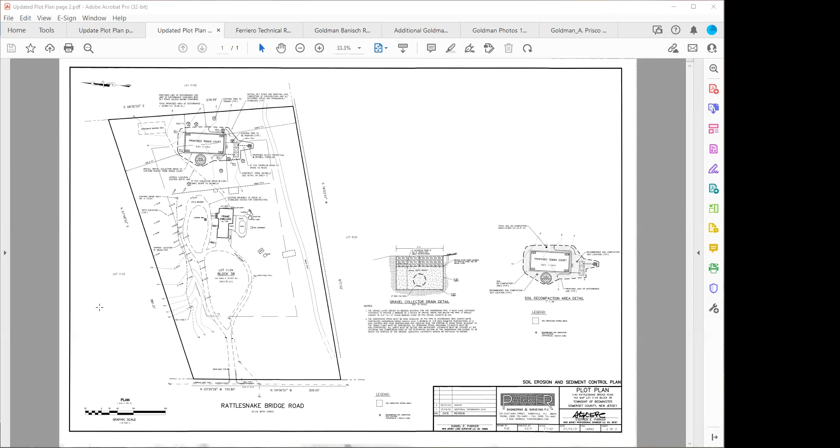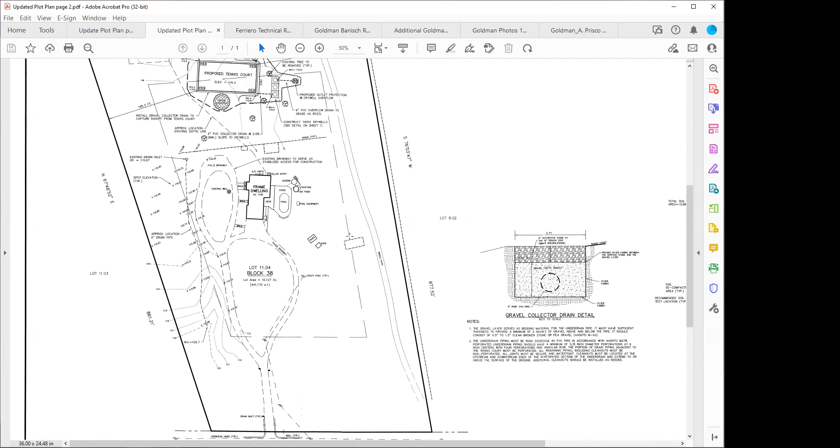If you go past the house continuing east, there's a fence which basically separates the front property from the back property. If you look at the property in totality, it's 10.1 acres. The front portion is about 7.1 acres, split from the back part by a split rail fence, and the back portion is 3.1 acres.

So if you opened up that fence at the gate past the house, you'd walk into a huge field, nothing in it but grass and trees. To the north you have woods separating my property from my neighbor to the north. If you walked all the way south, you'd hit another set of woods with a trail separating my property from Red Tail Farm.

If you walk to the very back portion of the property, past where the proposed tennis court is, you have additional woods there. I think my property runs maybe another 25 to 50 feet back, and then a neighbor's property, which must be set way back because I've never even seen the home, abuts us and the woods over there.

So the proposed tennis court location is basically dropped right in the center of the back property in the big field. It would be about 200 feet or more, separated by woods to the north. And it would probably be about 350 feet separated from Red Tail Farm, with woods, a trail, and then another set of woods which abuts the Red Tail Farm property.

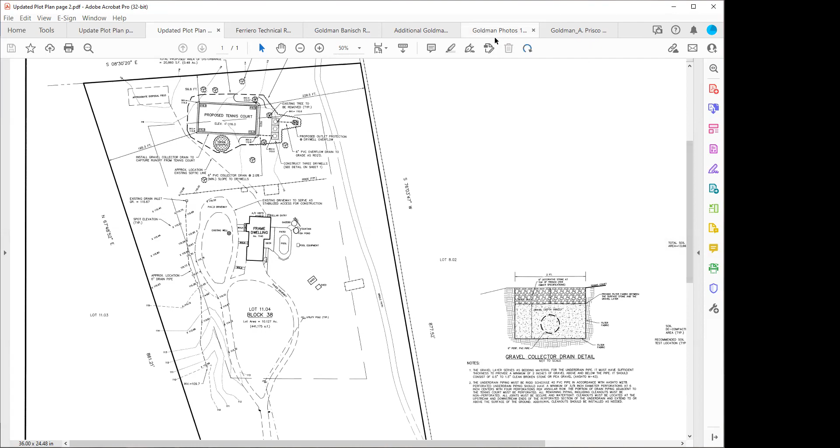Mr. Goldman, can you be on camera or is that not possible? I don't think I control that, I think Janine is the Wizard of Oz on that one. No, I mean, I'm on my camera, but right now my screen is showing the plans for the tennis court. All right, so you're sharing a screen somehow. Yeah, we are, but where it says his name, if his camera was on, it would show his picture. Is your camera on? My camera's on, yes. He's got a toggle on, maybe the setting. What do you think that is, Paul? I think his camera's not on. Yeah, you gotta check your camera, mister. Okay, let me check my camera. You might have to turn it off and turn it back on. What kind of device are you on? The camera I have is a Logitech. Are you on a laptop? Are you on a phone? I'm on a desktop. You go to the Zoom settings, you just click on the camera. Should be a video icon at the bottom of the screen. Right there, second from the left.

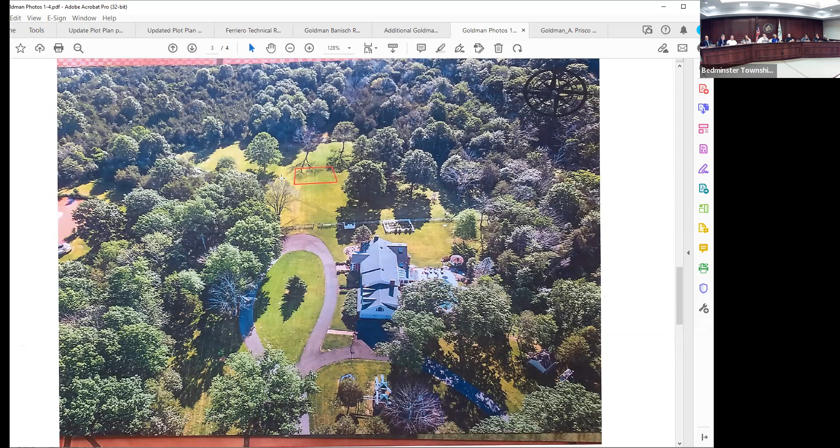This is looking south. This photograph is from the north facing south, with the Goldman residence in the top right portion. The proposed tennis court location is outlined in red, again in the lawn area.

What is that red area on the bottom of the photograph? It's a pond, just a pond, on the adjacent property, not on the Goldman property. That's on the property to the north, correct.

So that's the Goldman tennis court location. We can go back to the site plan, the plot plan.

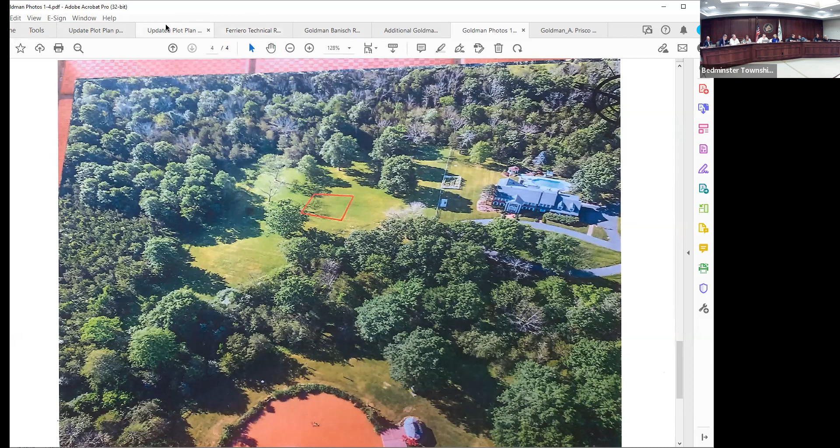Mr. Parker, again just for the record, the property is identified as block 38, lot 11.04, correct? That's correct. And what is the acreage of that property? 10.127 acres. And the zone it's located in? The R10 zone, that's rural residential, correct? Yes, correct.

You've described the improvements and shown them on the plot plan and the pictures, and you've been to the property personally, correct? Yes, I have. How would you describe the buffering around the Goldman property with regard to neighboring properties? It's pretty substantial, as you can see from the photographs, a substantial buffer on the northerly side as well as the easterly side, and even the front portion of the lot along Rattlesnake Bridge Road had a pretty substantial buffer of woods. So really the house and developed areas are in the middle of the site and it's surrounded by woods and trees.

And the current existing lot coverage for this property is what? 5.9%. And what is the allowable or permitted lot coverage in the R10 zone? 5% is what's permitted. And so that 5.9 is an existing condition today, correct? Yes, it is.

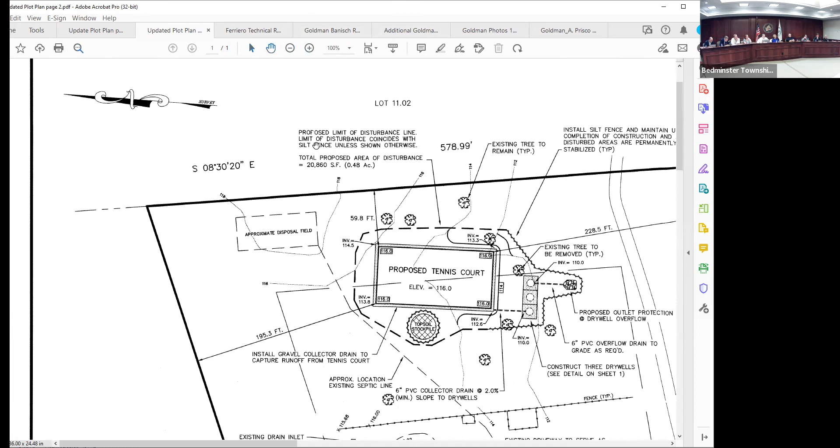What we've also proposed is a drain surrounding the tennis court to capture the runoff from the court itself. That runoff will be directed into dry wells. The dry wells are shown on the plan to the right of the tennis court, the squares with the circle in it. That's to address the stormwater runoff from the tennis court and allow it to infiltrate back into the ground.

That's really all that's being proposed, just the construction of the tennis court. There's no additional sidewalks, walkways, or driveways, as Mr. Goldman testified to. And the location of the dry wells is the reason why they're located on what would be the southerly side of the proposed tennis court, yes, it is.

The portion of the property where the tennis court is proposed drains to the south. It slopes from north to south in that part of the property. So the dry wells are proposed on the downhill side, the southerly side of the tennis court and of the property, because that's where the drainage naturally runs in that portion. So that area does drain to the south and away from the northern area.

Regarding the design of the drainage, are the drains around the outside of the tennis court to collect any runoff? Yeah, there's a drain system completely surrounding the tennis court, so any water that runs off the court will get collected in that drain and then directed into the dry wells. Based upon the drainage system incorporated into this design, do you have an opinion as to whether there will be any increase in the rate or volume of runoff as a result of this construction? No, they won't. This is designed in accordance with the municipal standards for any new impervious or lot coverage.

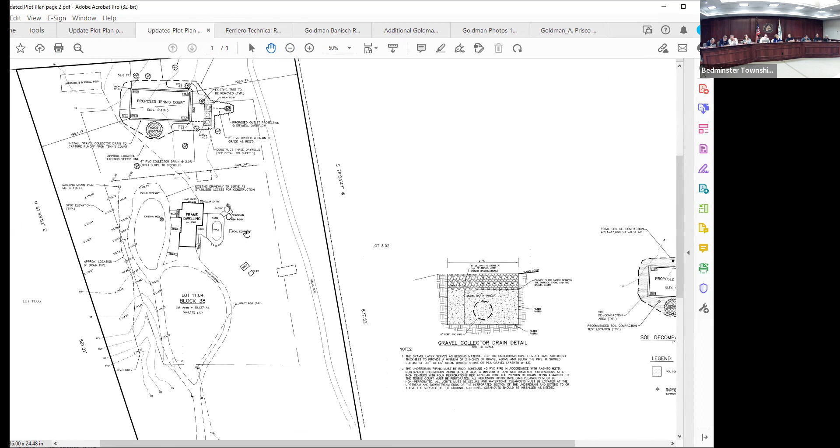Are you aware of the drainage system referred to by Mr. Goldman? Did you locate that as part of your plans? We did, and you can see it's shown on the plans. There's an existing drain inlet on the drawing, up there on the left-hand side. That's the inlet that was installed shortly after the driveway was paved. There's a drain connected to that inlet that runs toward Rattlesnake Bridge Road, to the lower part of the property, and that's where the outlet of that pipe is. So it drains that area and runs the stormwater out towards Rattlesnake Bridge Road.

Did you look at the topography to determine whether there's any natural swale or feature that would carry the water toward Rattlesnake Bridge Road? There is, and that's what the plans demonstrate. When you look at the elevations, the contour lines show that the topography in that area drains generally towards Rattlesnake Bridge Road. I think Mr. Goldman described a flat area where the water kind of ponded a little bit, and that is consistent - there is a flat spot there, but the drain has eliminated any drainage that occurred there, and it carries that out toward the front, toward Rattlesnake Bridge Road.

And you also heard Mr. Goldman testify with regard to the driveway that exists on the property. It's a paved driveway, correct? That's correct. And you're aware that the driveway was previously gravel, correct? Correct. Now, is there any distinction in terms of lot coverage between gravel or paved area? No, there's not.

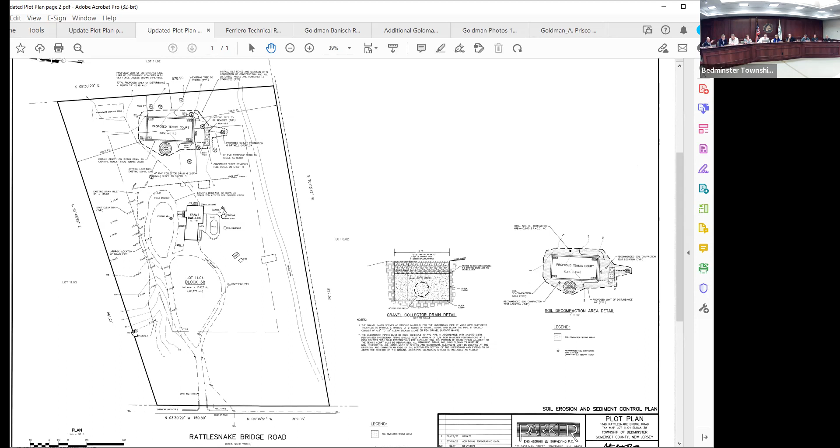Jeff, can you zoom in on the tennis court and topo up there, this area right here? Let's zoom in more. Steve, can you walk us through the topo lines up there at the court?

If you look at the area where it says approximate disposal field, that's kind of a high point, and there's a ridge or high elevation from there toward the house. If you draw a line between the house and that disposal field, the area to the right of that line would drain toward the south, and the area to the left would drain either toward the north or toward the west, Rattlesnake Bridge Road. So all of the area where the tennis court is proposed drains toward the south.

How much regrading of the actual tennis court area is there? What's the differential between the left side and the right side, the east side and the west? The elevations we're showing have about 4 feet of elevation change from the left side, the highest side, to the right side, about 4 feet at 116.

So is the plan to excavate the left side or fill in the right side? Fill in the right side. The tennis court is at 116 though, right? It'll be level with the existing ground on this corner here, the upper left-hand corner, the northeast corner. So the tennis court is 116 in all four corners. If it's at 116 continuously, it would be like a 2% maximum grade.

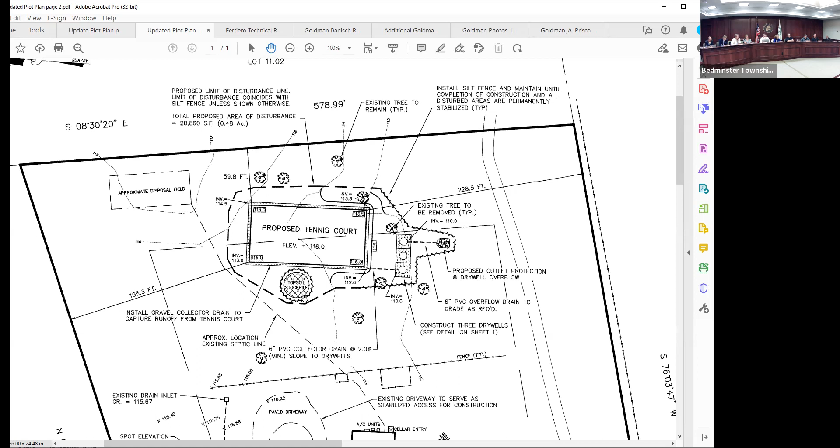There's a detail for it on the plan. It's a trench with a pipe in it that's filled with stone. The runoff comes off the surface of the tennis court, gets collected in that stone, drains right into it, and then gets carried by the pipe into the dry well system.

So the stone will be visible all the way, like kind of a moat stone? Yes, the water will go right in there and then drain to the other side of the property. That's correct.

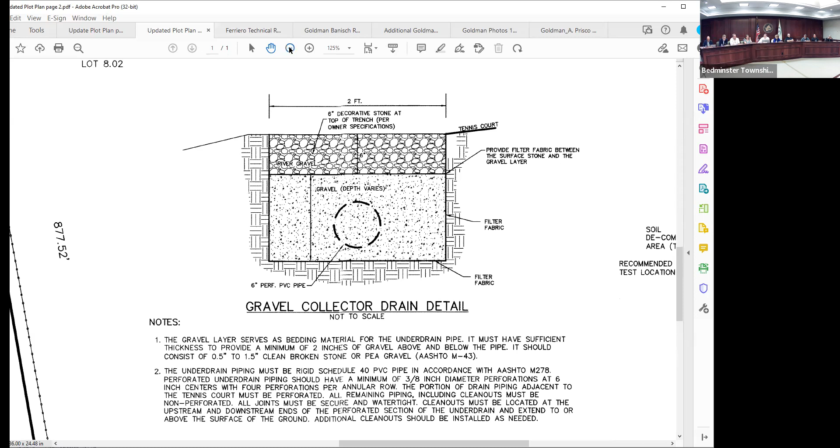Is there any maintenance required for that system over the long term? Well, there's maintenance required for dry wells. They have to be inspected and checked to verify that they're in fact working, and get cleaned out as necessary. They do collect some solid materials, so they have to get cleaned out.

And how often is that done, just curious? It depends on what the upstream area is like, whether you're getting silt, leaves, or mud, that kind of thing. Obviously you'd need it more frequently than something like a tennis court, where you're just going to really have pretty much just run off the top.

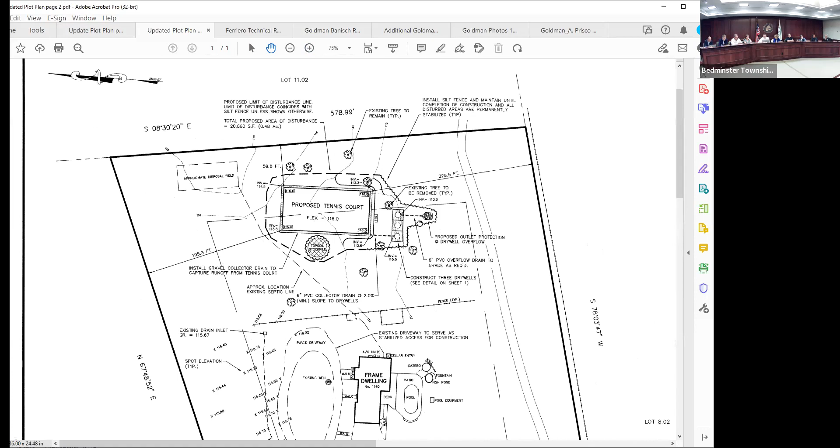Could you zoom in on the dry well detail? We're all familiar with Bedminster clay and shale. So really it would be the function of this dry well's size and proportions to accommodate most of the water generated, because the water may not go beyond the walls, bottom, and sides of that dry well for days if it's clay and shale on either side and underneath it.

Correct? Well, it's designed to capture 3 inches of runoff, but the gravel is what's going to retain and collect the water. The dry well itself is a concrete structure, a big concrete cylinder, surrounded by gravel, which provides the storage capacity required by the ordinance.

Then you have outlets within the dry well for where the water goes once it's discharged. That concrete cylinder has perforations or holes in it, so water collects there but then disperses into the ground, into the shale and clay. It's like a detention system, really.

Okay, and how do you go about sizing such a dry well? It's based on the area of impervious coverage that you're adding. And that's by formula? Yeah, the township has one. Then how do you determine how the outflow works, how fast that cylinder is going to get rid of the water? How do you figure that out?

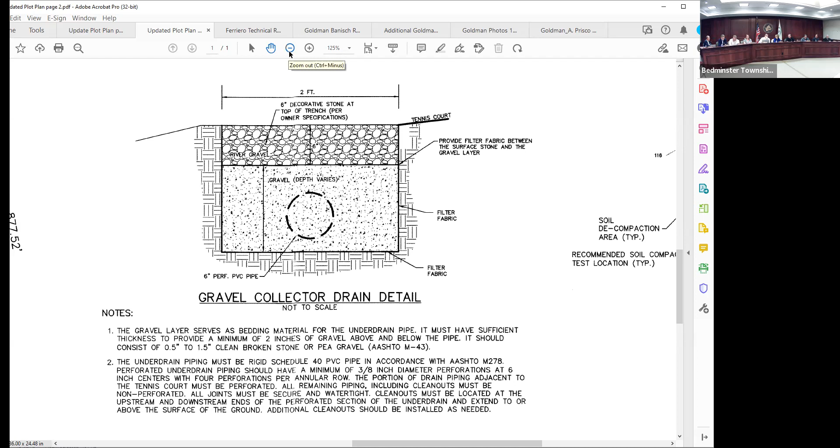Yeah, but you just said that if you're satisfied the drainage addresses the variance before us—you're trying to fix something that's not before us. Well, I want to know that what was done here wasn't done without anybody's approval. But you're not here as the enforcement guy, that's not your job. Because Tom has told us in the past—

Yeah, Paul wants to speak. Paul wants to speak. You haven't been deputized.

I did have a couple, but I'm being told it's irrelevant. Why don't we just hear the testimony and then you'll decide? Okay, if I could ask Mr. Parker a couple questions. Absolutely, Paul. Because I know there's a World Series game on. Yes, there is. Might be over.

There appears to be a question about 0.9% of the lot—how much area is that? It's just under 4,000 square feet. Do we have a calculation for the area of the driveway? Well, the numbers are on the plan, I don't have the percentage breakdown for that, I think it's on the other sheet.

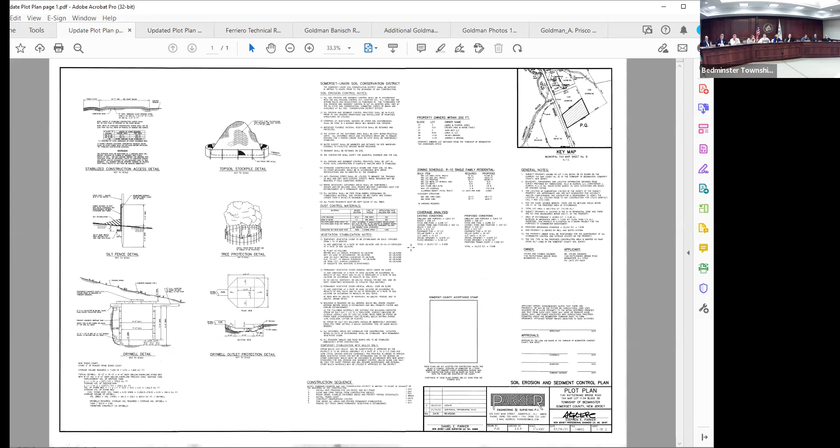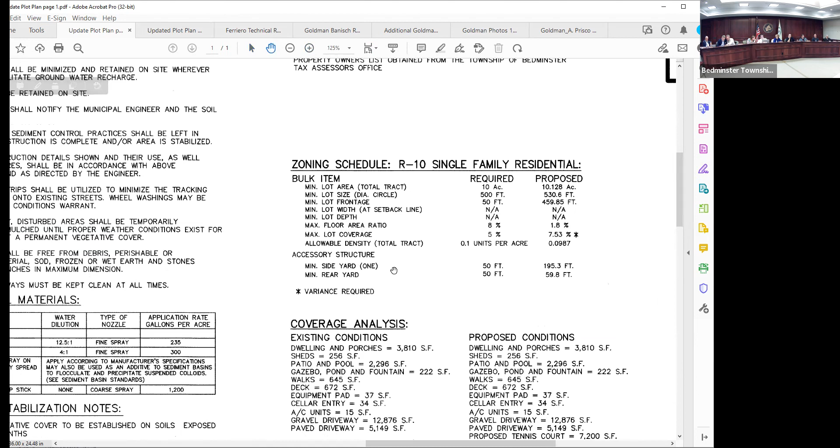My other question is, what kind of drainage inlet is that at the top end? It's a yard pipe, it's plastic, not concrete. Is it possible to put a couple more of them over the existing pipe to collect the areas in that driveway in case it skips over some of that flat area and heads to the north? I frankly don't think that's very difficult to do.

That would put the water down to the street, and Mr. Simon might have more to say—I guess I'll let him speak. It may... that doesn't happen. But we'll listen to whatever you have to say. Okay.

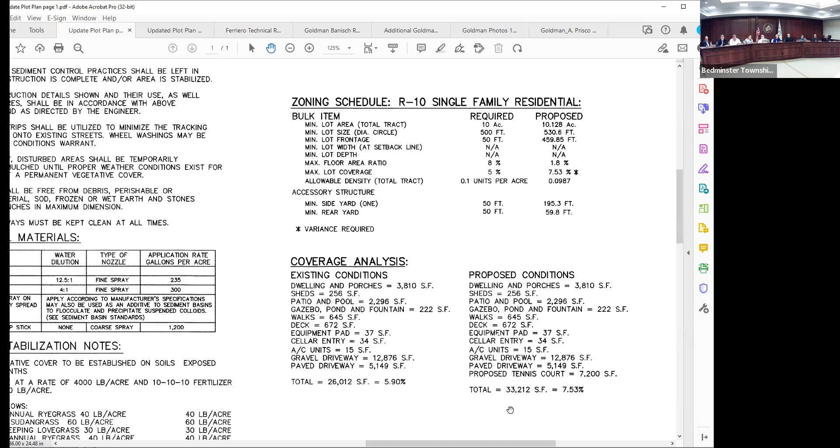Hearing what I've heard and where Mr. Simon's been going, particularly because of the nature of the construction of that system, a couple of additional inlets—probably 2 is all you'd need—over the top of those, similar to the one already out there. Not heroic construction by any means, but it would collect that water and get it back down towards Rattlesnake Bridge Road from the driveway runoff, so it doesn't go to the line at all. Makes sense.

Any other questions, Mr. Parker? The engineer, Paul Ferriero, wrote a letter with four comments. One was just administrative soil erosion, and details about the fencing and lighting.

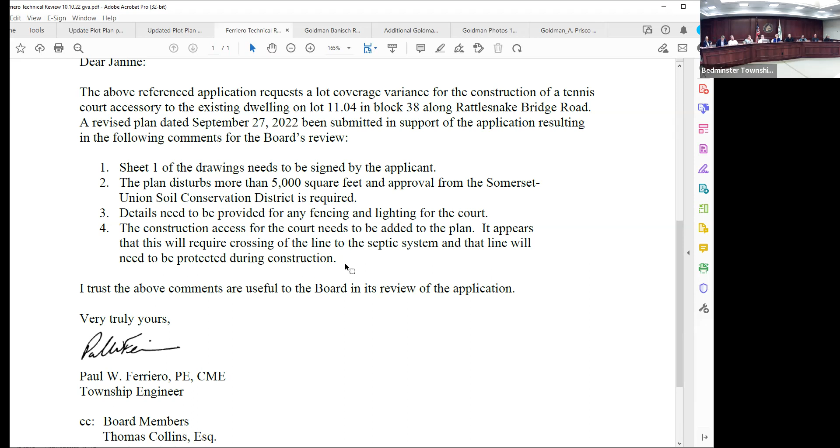So when was that addressed? I know earlier there was testimony that there would be compliant fencing, but it's not depicted on the plan. We'll provide a detail for the fence, because that is part of the proposal. Right now there's no lighting proposed; if it is ever proposed, it would conform to what the ordinance requires, which is 15 feet for tennis courts.

And would they have to come back for that? No, no—for the lighting, yes, that's what I'm asking, for the lighting. So the fencing is permitted under the zoning ordinance and would have to be shown on the plans, but the lighting is a conditional use, and it would have to come back to this board. So lighting would come back.

And what kind of fence are you proposing? I don't know off the top of my head, I think it's probably some kind of chain link type fence that just stops tennis balls. Oh, okay, I understand, for the tennis courts. Yes, okay, I understand.

Anyone else for Mr. Parker? Just a quick question, on the plans it mentions both paved as well as gravel driveway, but I thought it was all paved, so I'm a little confused. It is all paved, it says gravel, that's an error, it's all paved. It says 12,000 square feet in the coverage analysis. Sorry, you're right, that's an error, it's just all paved. The numbers don't change, but it shouldn't say gravel. So it's 17,000 square feet of paved? That's correct.

I'm a little confused on that. You're saying it didn't change from gravel to paving, yet Mr. Goldman said it did change, that it was reduced. Well, the confusion is on the plans, the numbers on the plans are intended to reflect the current condition, and it should say paved. I think it says gravel somewhere in the chart, that's an error, it's all paved, the numbers don't change, but it should say paved. So when it was all gravel, it was larger than the 17,000? The number would be exactly the same. I think what he's getting at is Mr. Goldman testified that when it was an all gravel driveway, it was larger than what you depict on your plan. Yeah, that's correct, I don't know, Mr. Goldman testified to that. So the current condition, are these the numbers? Yes, and it's correct, 5.9%. Right, it's like 17.9. That's right, whatever it is, okay, 18,000.

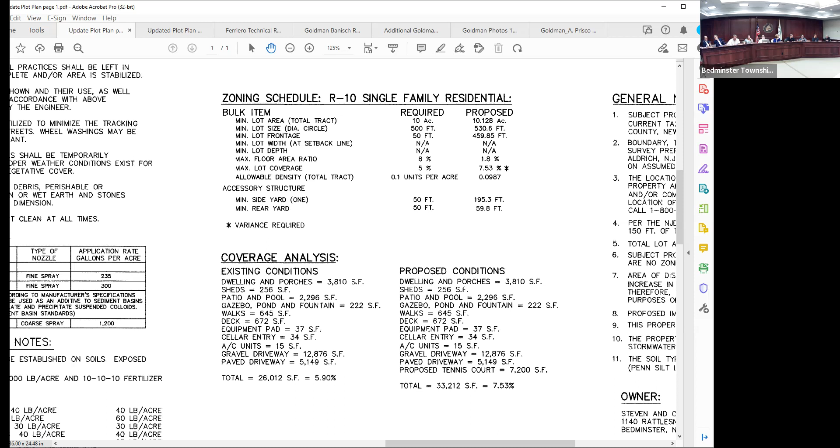It's obviously been there, I think for the type of home that it is, this is an estate-type area. There's a driveway for the residents, and then there's a driveway for the guests that come out to the front. Yeah, but looking at this picture, a lot of that could be eliminated, I mean that's what I see, I don't see the need for that. I mean, I back in and out of my driveway. George, I think what you're really saying is there's a lot of redundancy in the fact that there's two loops, right? Well, it just seems like a lot of impervious surface. I mean, you're not getting a lot of bang for your buck, you're losing out on the tennis court. That's how I see it.

Maybe you could show us, is there a garage in there? The garage, is that on the west end of the house? Is that the garage? Right, so there's a drive to there, and then the circle is in the front, and that's the front of the house on the left-hand side. Front of the house faces north, towards the neighbor's property. And then you have this extra loop that connects the main driveway to the garage pad. Right, but you could get there either way, it's superfluous. So everything on that loop, starting on the right, as it loops up to the garage, is extraneous to the extent that you can still have direct, clear access the other way. So that's all paved now, that whole entire area? Yes, it is.

Anybody else, Mr. Parker? We'll open it up. How many guest parkings, how many guests can park there? A lot. Sure, a lot. Depends what they're driving, I guess. Yeah, not as many Bentleys.

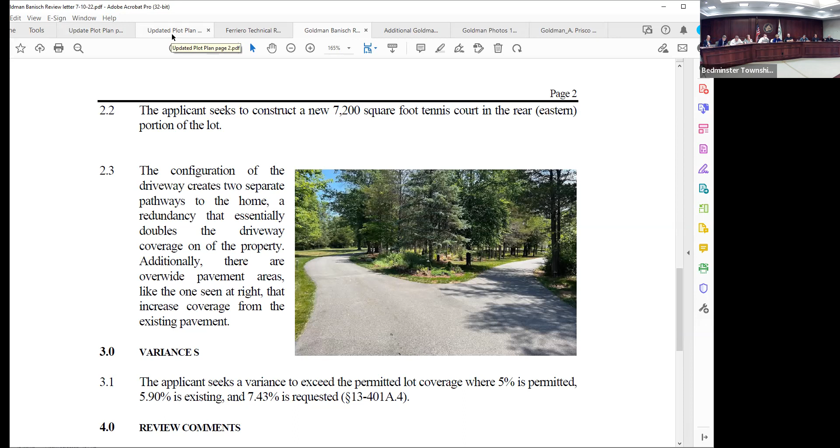So could you take out portions of that single lane driveway the way it's laid out now without completely obliterating this layout? I'm not an engineer, but in my opinion, I think what would end up happening is cars going down with nowhere to go. They'd have to make K-turns on lawns, back out of long stretches of one-way driveway. So you may take out a portion of the loop, but I think you'd have to compensate by making some of this driveway area wider and providing turnaround areas for cars to turn around.

It's just not something Mr. Goldman thinks would be attractive. Coming from the landscape architecture side, I feel this is a much more aesthetically pleasing design to have the driveway almost hidden by these islands of vegetation, where the driveway sort of disappears around them. Again, I think it's more about aesthetics and safety.

Frank, I don't mean to extrapolate from your comment, but am I getting the gist of it? You hit the nail on the head, Larry. I fully appreciate the estate character of the property and the landscape elements that create that character. If this driveway came in and got you into the garage, this portion of the driveway would be superfluous. That was really the point - if you want to get back coverage, there seems to be a place to get it without compromising adequate access to the dwelling.